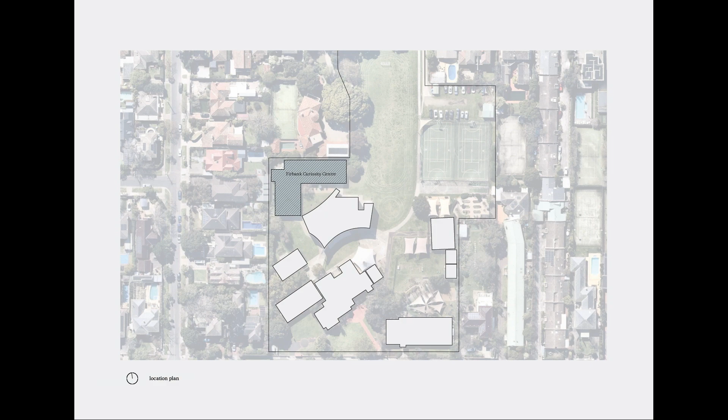It's a project close to my heart. It's my old school. I was at the high school of this primary school. And here I am with my chemistry teacher.

Back when I studied there, not many girls were taking on science and engineering-based subjects, which is still the case today. So I'm excited about this project and its potential to inspire young women to study STEM subjects and to also understand the important relationships between maths and art and food tech and science.

We've entered it in the small project category. While it's an educational project in nature, we've entered it here because the budget was very small and we weren't involved in all stages of the project.

We've worked hard to do a lot with very little. This modest project illustrates an approach to sustainability that sees value in adaptive reuse of redundant building stock and hopes to inspire the next generation to nurture precious resources.

The proposed site for the new Curiosity Centre contained two brick buildings, an old assembly building and a general purpose classroom building, that enclosed and sat at the periphery of a small triangular courtyard.

So the learning spaces here lacked a connection to the garden and missed the opportunity for outdoor learning, partially due to limited permeability along the garden interfaces.

A low, dark, unactivated veranda wraps the facades facing onto the garden. It had a very institutional and rudimentary character.

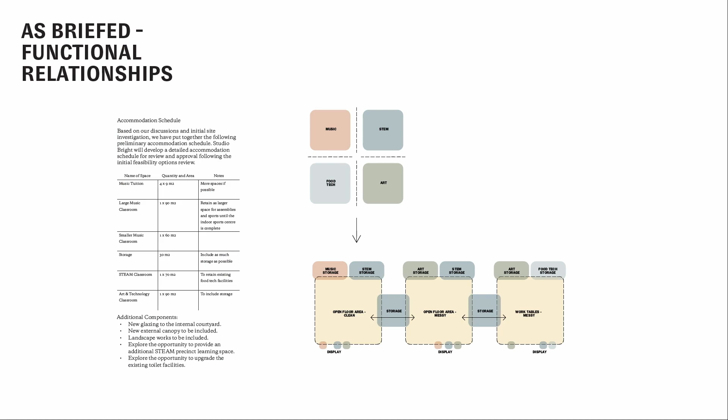Our challenge was how to adapt these two ordinary institutional school buildings with a limited budget into an identifiable, cohesive precinct for the school which supported and celebrated the STEAM curriculum.

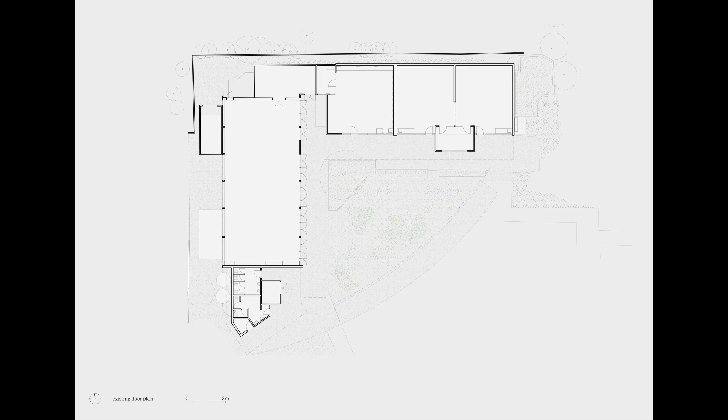We expanded the brief, suggesting bringing the kitchen garden from another site over here, and proposed planters and a citrus orchard for lemonade making in summer.

In terms of the interiors, it was very light touch, functional spaces that support a range of flexible student learning.

So to the canopy. Its key job was for rain protection and to expand the learning spaces to the outside. This is the existing, a diagram of the existing that Tara's already shown you, with the poor quality elements removed.

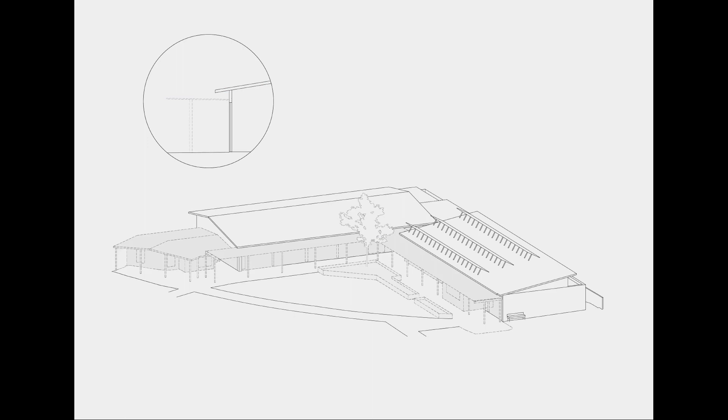We considered what the essential job of the canopy was to do. Whilst it needed to keep out rain, we felt it needed more depth so that it could hold the precinct together as one, and hold those other buildings together. So it was thickened, adjusted for the existing buildings and drainage connections.

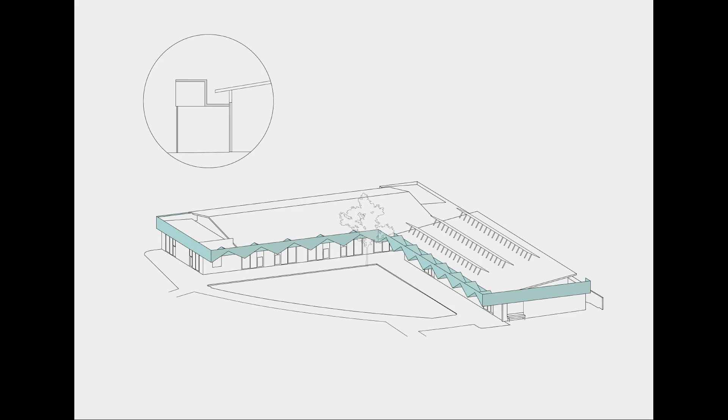Rather than a chunky band, we imagined it as a series of repeated gables. With north up the side, its job wasn't necessarily about shade, but more about rain protection, so we made it translucent to let the sun shine through.

Because the canopy was all about rain, we liked that the students could understand how it worked. Rain collection and drainage is celebrated, and the connection with the kitchen garden program is made outside. We're excited that architecture might be a tool for learning and student engagement.

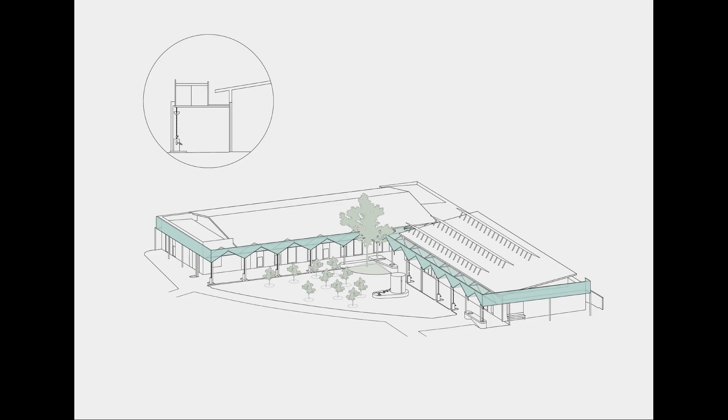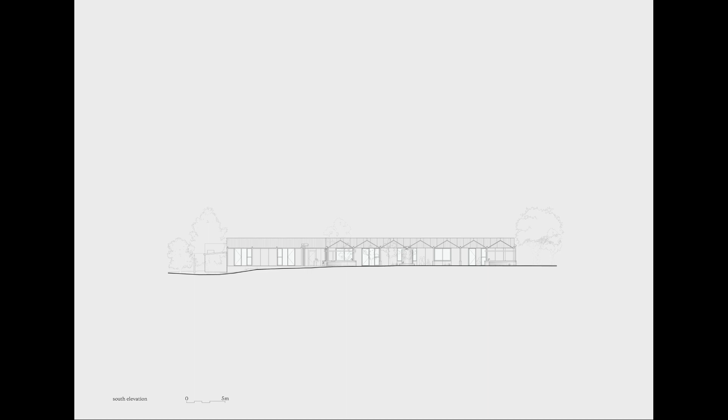We looked at greenhouses and thought the canopy design could be informed by them. We liked that it connects the program to food production with the food tech program. It's essentially a series of little roofs that catch the water the students can then use in the kitchen garden. We like that the students are learning about resources and measurement and so much more.

The detailing celebrates water collection and plumbing wherever possible. Not an easy feat when you're not on site with the builder or plumber.

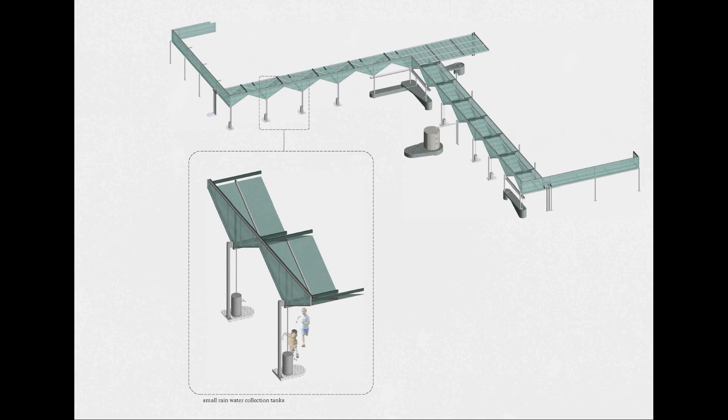3D diagrams, small rainwater tanks that connect to the little roofs and are used for maximum interaction. The large water tank connects to the bigger existing roof and has big numbers on it on a measuring gauge so that students can track the water storage amounts.

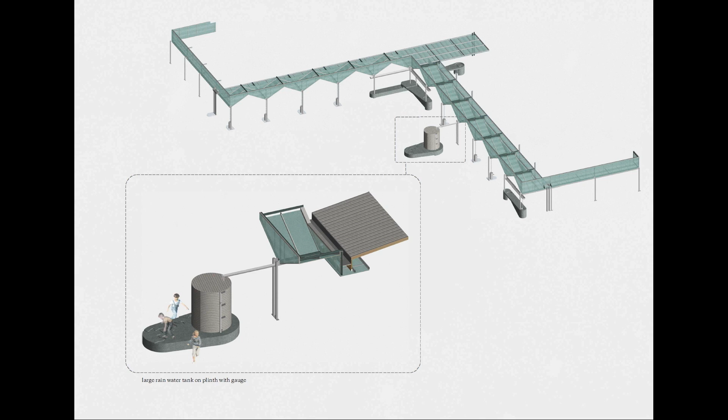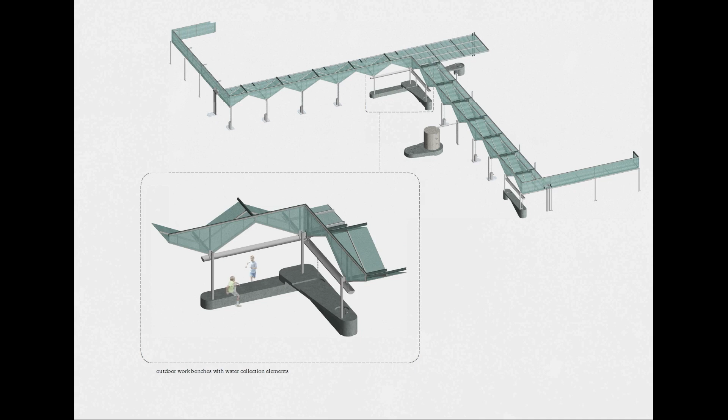We imagine a celebration in drought season when the tank is full. Outdoor benches connect to plumbing and provide a potting bench or a place for messy art projects. Water play and learning are part of every element, with hand washing a communal and important activity in schools these days.

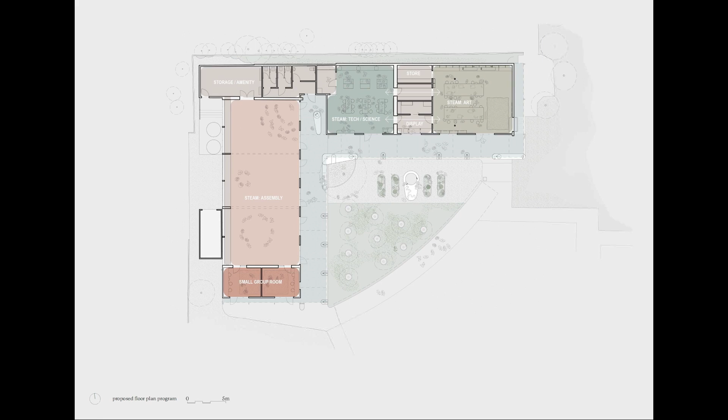It's a very rough phone video, but the chain downpipes and feeling close to rain were really important design factors. While it's a lot about maths and engineering, it's hopefully just as much about water play and fun, the kids learning and not realising that they're doing it.

And that's it. This project is not eligible for the sustainability category because it's just too small, so this is the only category it's entered in here. We didn't get the ticks on all the right things because we didn't change enough of the other buildings, so we got an NA in some categories.